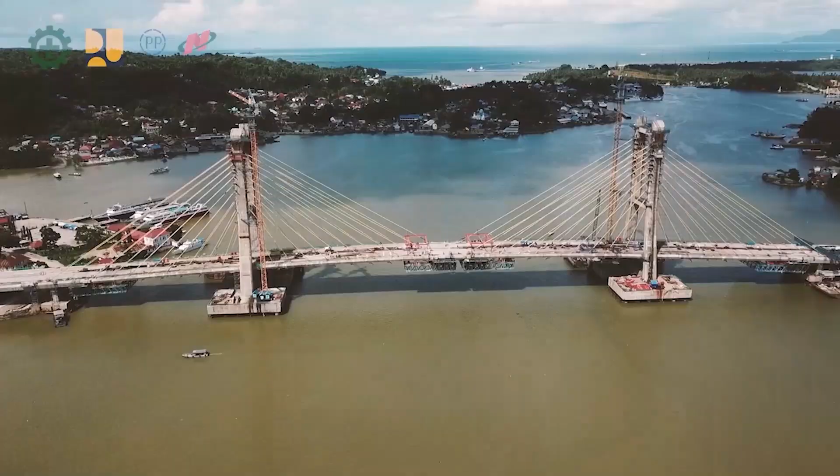PT PP Persero Tbk is one of the largest state-owned construction companies in Indonesia, with main businesses spanning construction, property, precast, construction equipment, and investment. The company has successfully become one of the main players in national construction business through the accomplishment of various big projects. In line with its vision of empowering the future, PT PP Persero Tbk is a trendsetter among construction companies in Indonesia.

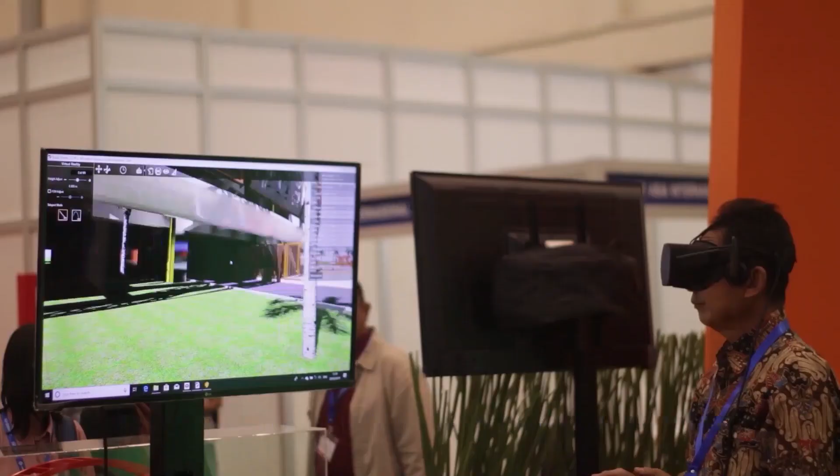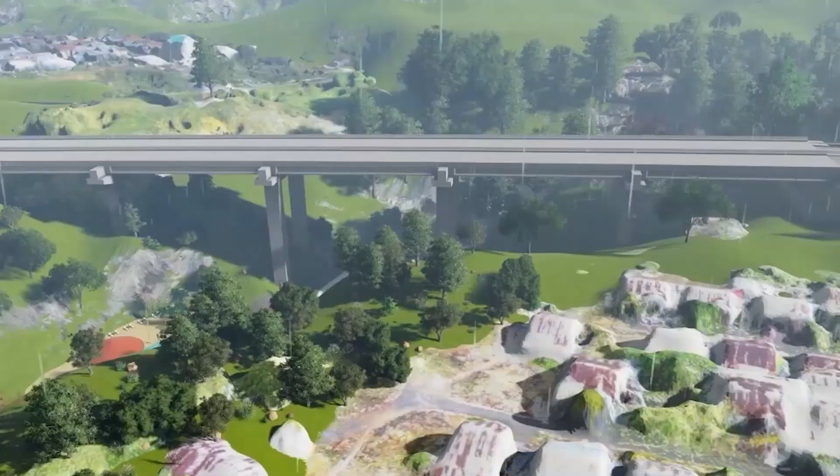In 2017, the company was the only construction company acknowledged as a pioneer in practicing BIM, committing to implement BIM in all its projects throughout Indonesia. This effort is supported by the success of executing Digital Construction Day twice, in 2017 and 2019, as the biggest international digital conference in Indonesia.

Jakarta is the capital city of Indonesia as well as the main economic center. Speaking of Jakarta reminds us of a concrete jungle, a modern city filled with large buildings. The road infrastructure facilities and accessibility of the city also follow its existence, indicating the importance of infrastructure in supporting the country's economy.

Throughout 2019 to 2024, the government of Indonesia is focusing state funding on infrastructure development, one of which is the Lenteng Agung flyover in Jakarta.

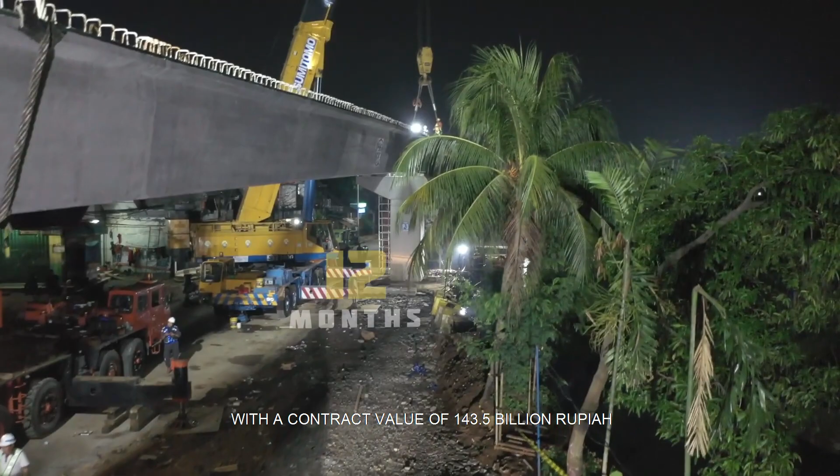This project has a length of 886 meters for its elevated structure and 200 meters consisting of on-ramp and off-ramp. This project will be completed within 12 months, with a contract value of 143.5 billion rupiah. The type of construction contract used is lump sum design and build. This will be a challenge for the project team to work quickly, carefully, and accurately.

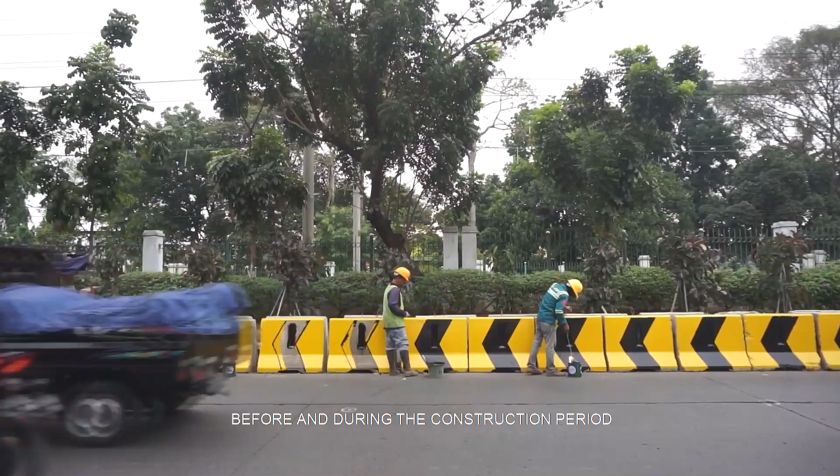The construction of Lenteng Agung is one of the projects that faces great challenges before and during the construction period. The main challenge faced by the project team is building the construction in a work area alongside Jakarta's commuter railway. This area is one of the densest railways in Jakarta, as it connects Jakarta city to Bogor and vice versa.

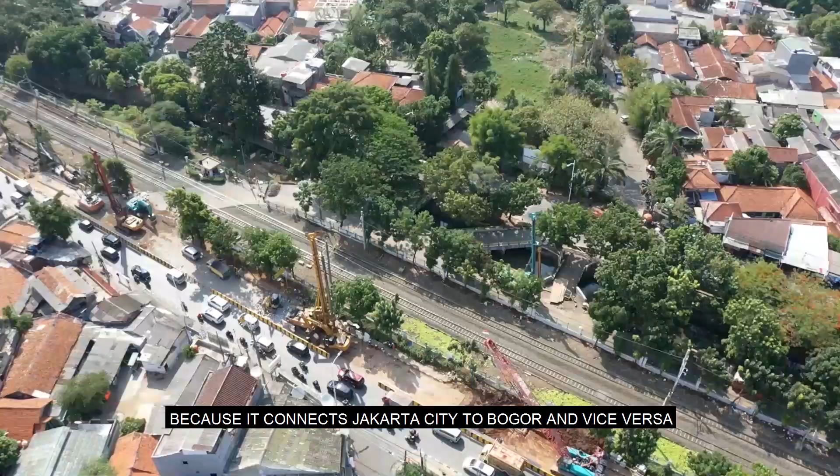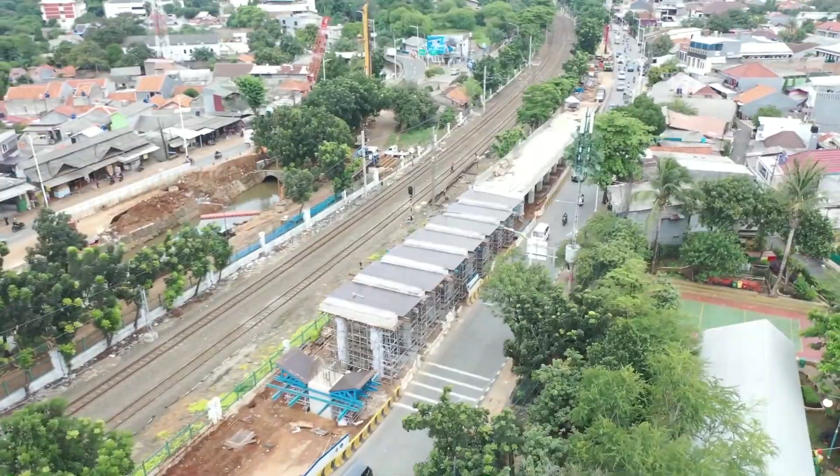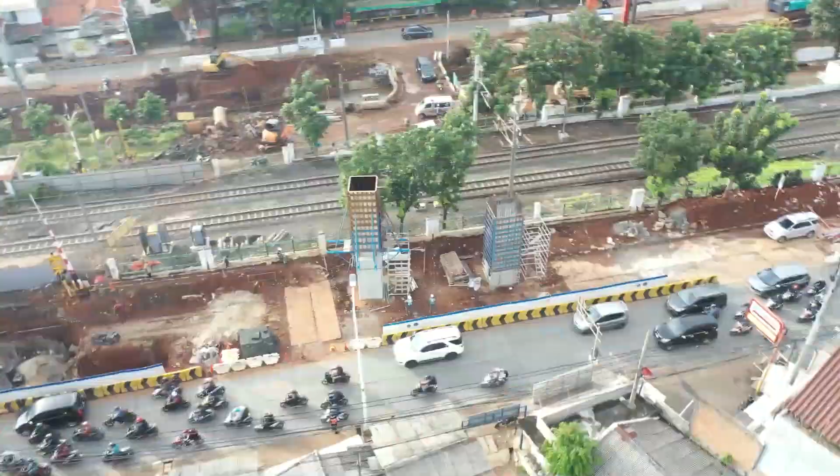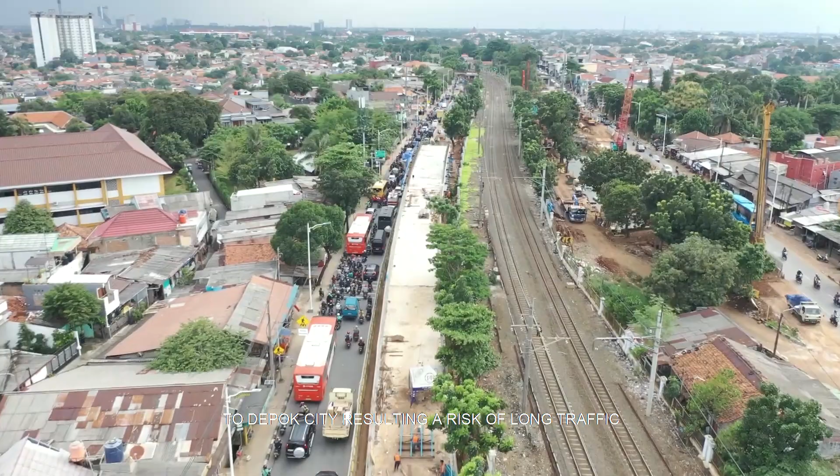Setting the window time at working hours is one of the things that must be conducted, remembering this is an active lane. There is also potential risk regarding the train's electricity utility because the work area is along the active railway. Besides that, many houses around the project area also become a challenge, remembering the work area is in the middle of the city. The project area is also located on the access road to Depok City, resulting in long traffic, thus slowing down the project's window time.

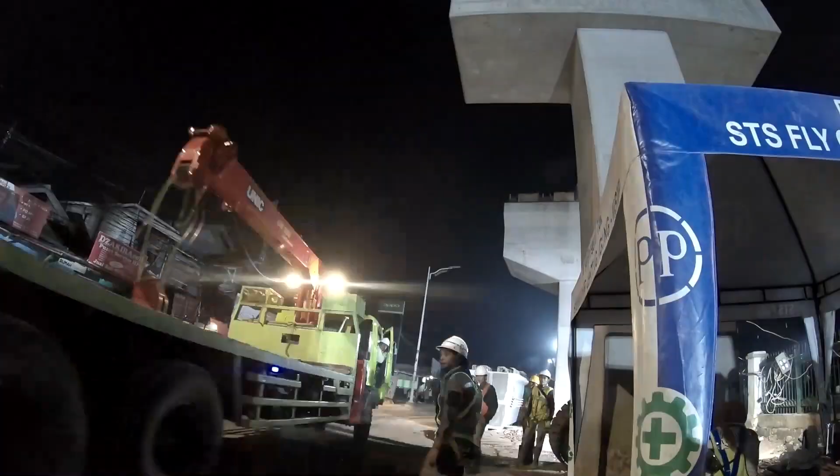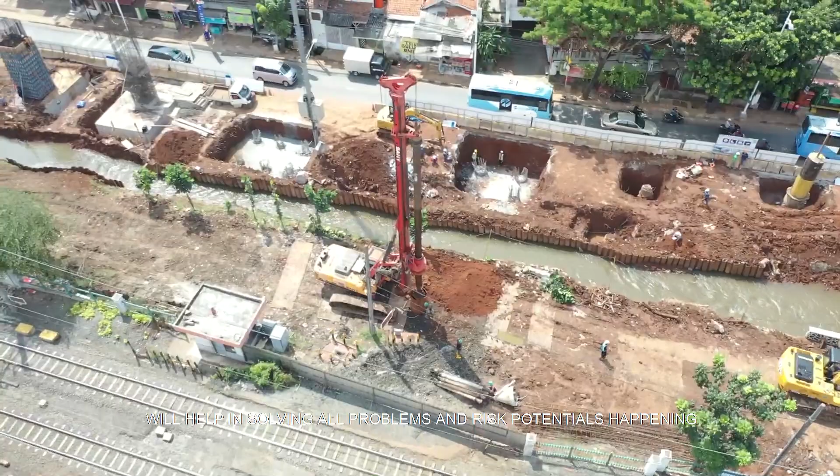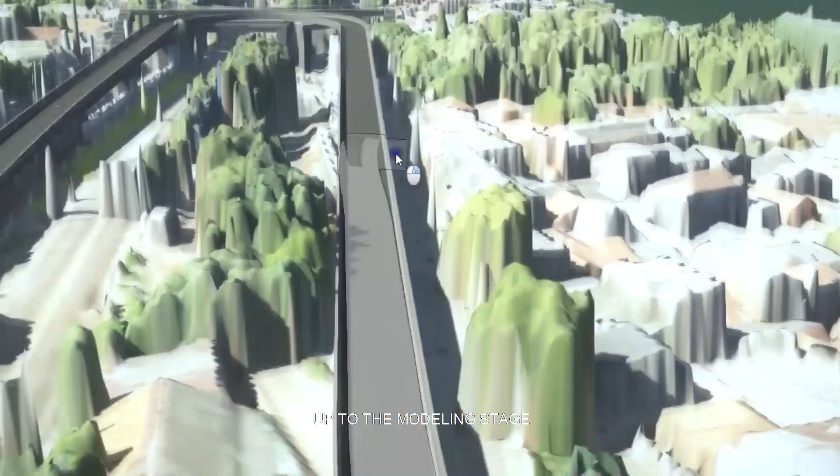Utilizing and implementing BIM, Building Information Modeling, during the construction period will help solve all problems and potential risks, starting from using the photogrammetry process in survey mapping up to the modeling stage with clash detection identification at every stage of work. The use of BIM solution as part of problem solving in a project is one of the solutions for carrying out construction rapidly, effectively, efficiently, and accurately.

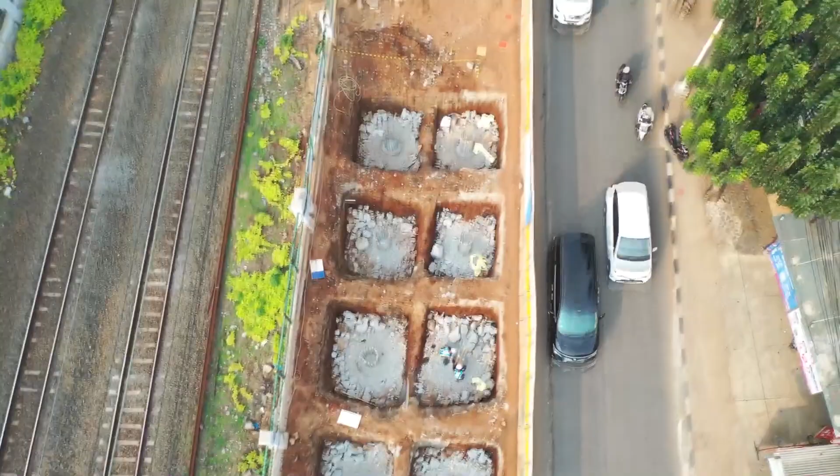BIM implementation in this project begins by collecting supporting information such as raw data, surveying, and topography information, as well as reviewing and cross-checking the construction drawings in order to avoid any mistakes during the modeling process.

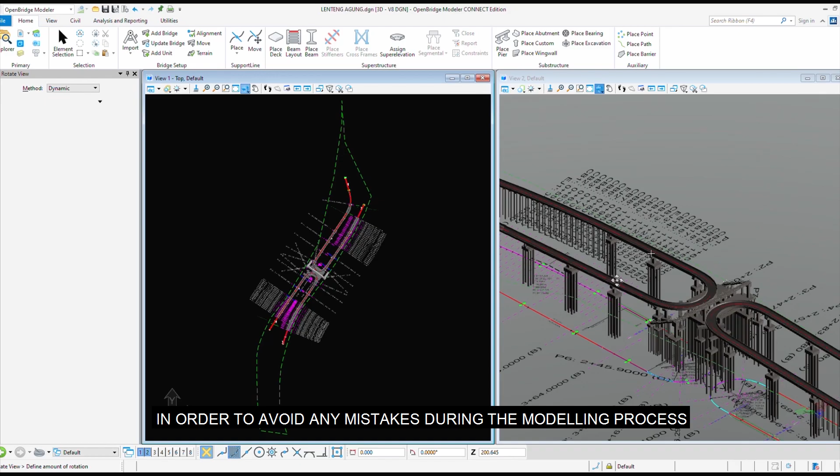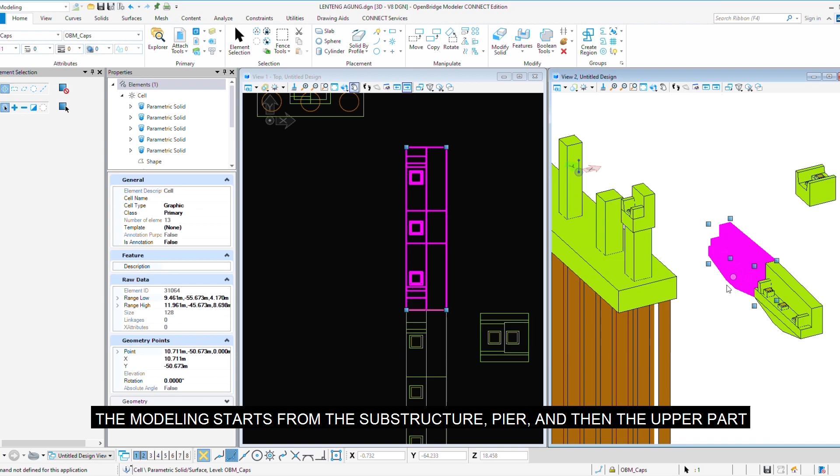The BIM modeling is started by making the element of the road using Open Bridge Modeler. It is then continued by making an elevated structure model based on the 886 meter drawing design. The modeling starts from the substructure, pier, and then the upper part. Modeling the slab on pile structure is also executed.

The use of OBM can result in quantity take-off data such as concrete material volume, the identification of girder, and other materials needed as well.

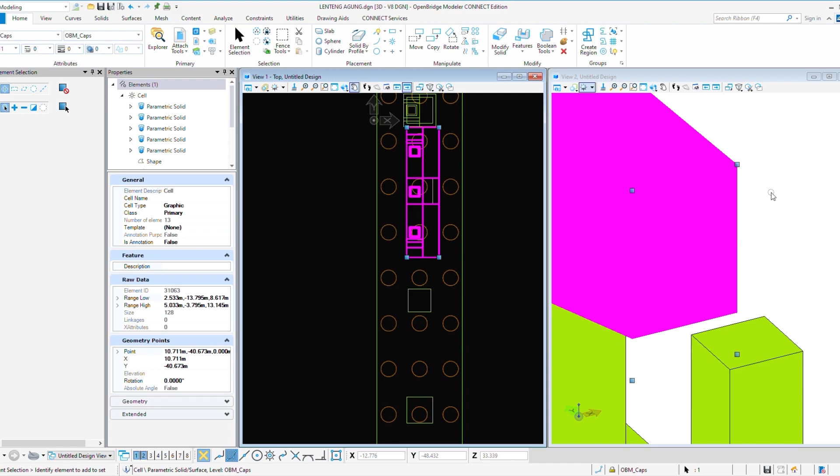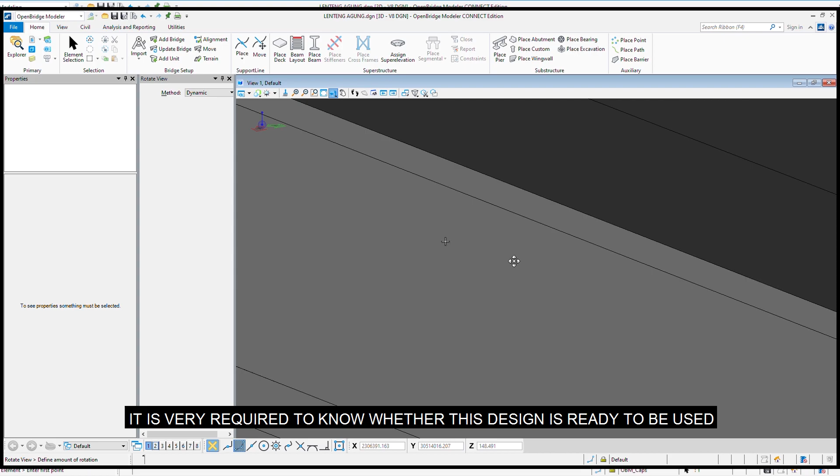Other than that, BIM is also used in this project to detect whether there are any potential clashes between the modeling result and the existing conditions on site. It is very required to know whether this design is ready to be used in the construction process and for shop drawing.

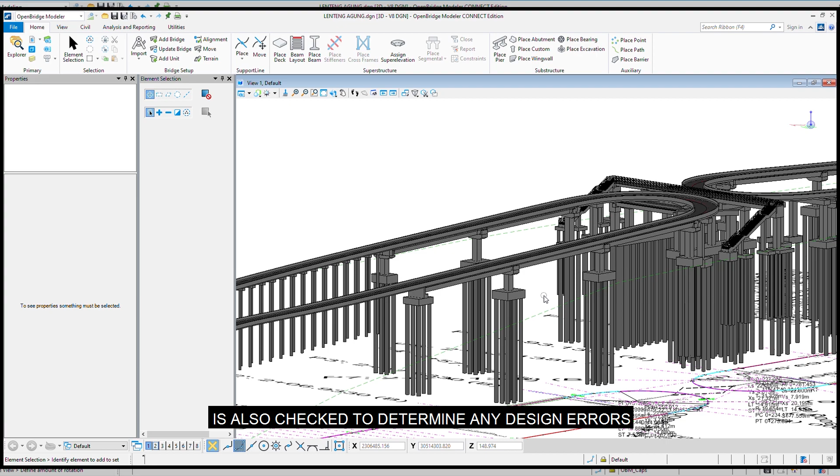Not only that, the potential clash between the modeling and design drawings is also checked to determine any design errors. This is held with the planning consultants as a form of coordination among stakeholders.

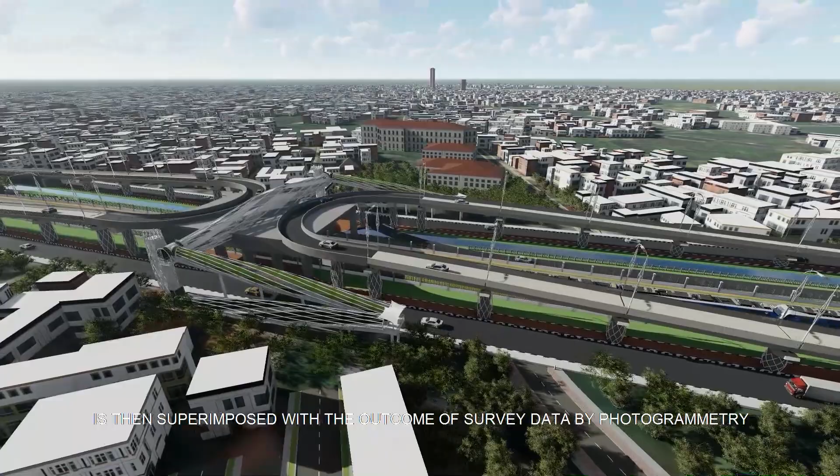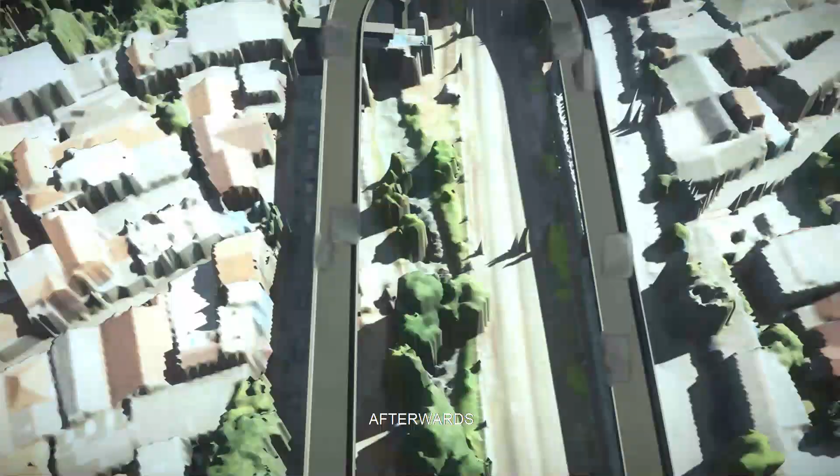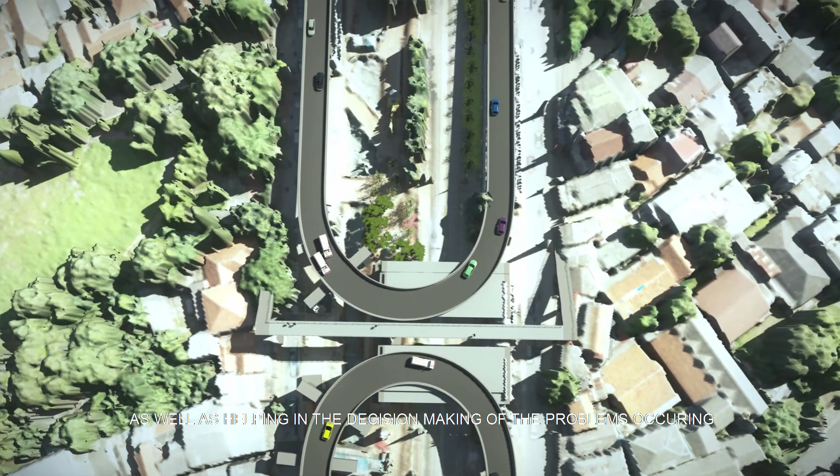The result from the BIM modeling is then superimposed with the outcome of survey data by photogrammetry or with other survey data to view the finished 100% model applied to the field. Afterwards, the finished modeling is also visualized using LumenRT. This is usually done when presenting the BIM result to the owner, planning or supervision consultant in discussing the construction method, representing the results of the drawing design, as well as helping in decision-making for problems occurring.

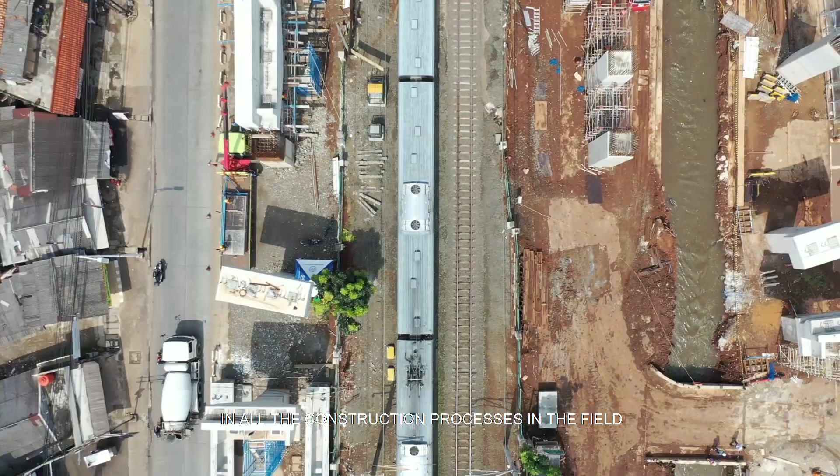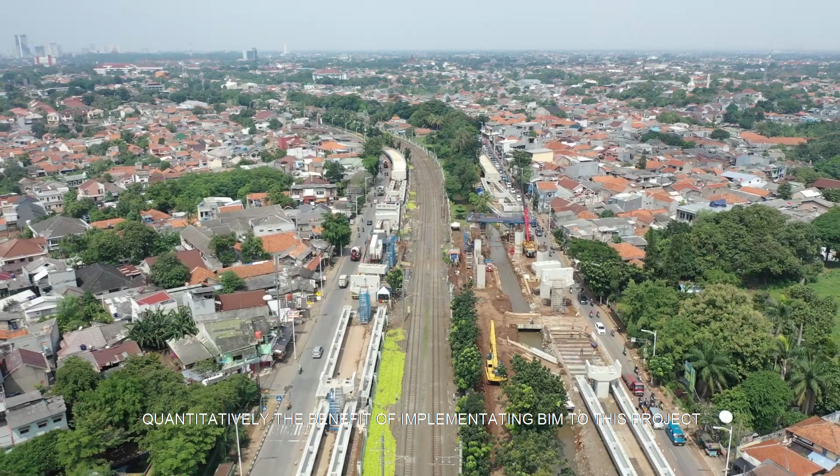Conceptually, this BIM is very helpful in all the construction process in the field. This is proven in an analysis of benefit-cost ratio in this project. The benefit-cost ratio analysis is done to measure quantitatively the benefit of implementing BIM to this project. Benefit per cost ratio calculation is divided into tangible benefits and intangible benefits.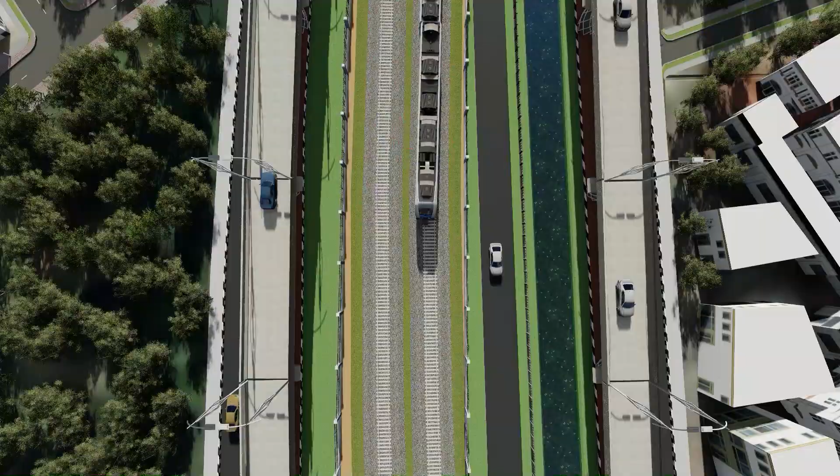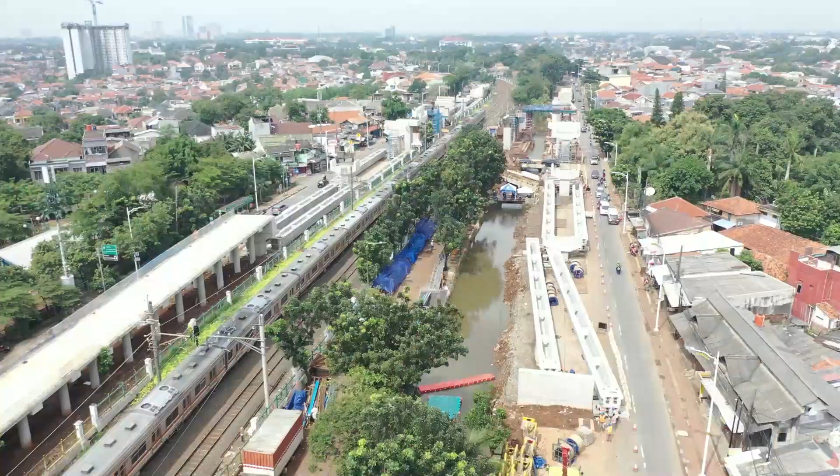Getting the result of the implementation of BIM in this project gives real benefits in the acceleration of structure volume calculation by 32.8%. BIM also accelerates the implementation time by RFI models by 26.4%.

The approval acceleration of BIM application in the implementation method can provide benefits of 26.34%. BIM is also able to reduce potential waste material risk by 38.5%. The benefit of BIM can also reduce the potential risk of work accidents by 21.9%.

And the reduction of liquidated damage risk by 12.85%. This means that the entire BIM can provide real tangible benefit in this project by 1.85% of the BIM implementation fee.

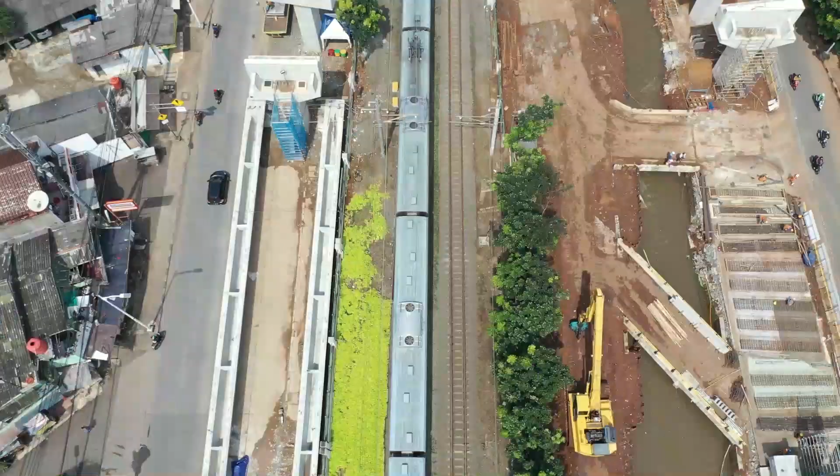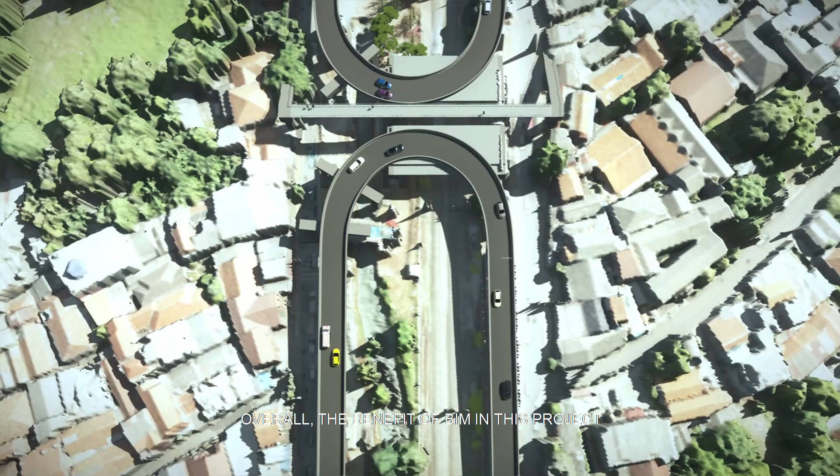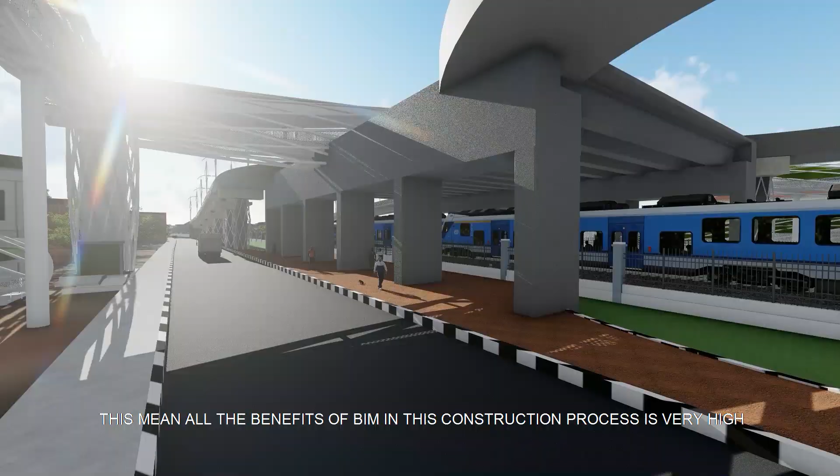While viewed from intangible benefit, the benefit of BIM is also achieved by 38.56%. Overall, the benefit of BIM in this project compared to the project cost is 2.24%, or 454.9 million rupiah.

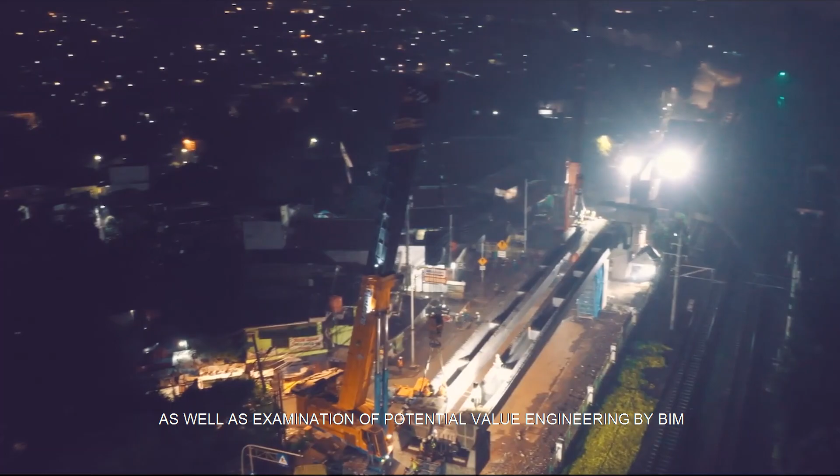This means all the benefits of BIM in this construction process are very high compared to the overhead cost. This benefit is verified in the use of the construction method, issuing quantity data, coordination, RFI model identification, as well as examination of potential value engineering by BIM.

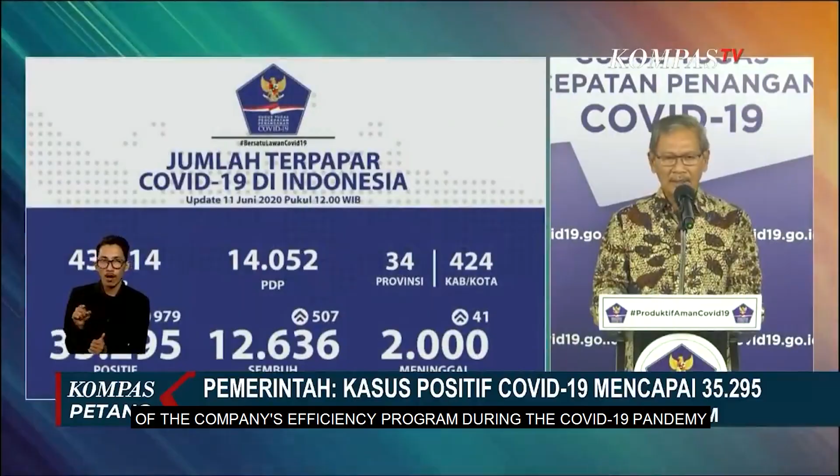This is consistent with the company's policy in the effort of the company's efficiency program during the COVID-19 pandemic.

As you can see, how is the implementation of BIM in the Lenteng Agung Flyover project? Do you still doubt the benefits and effectiveness of BIM applied in this project? Before it's too late, let's apply smart construction in all of our projects with BIM starting from now.